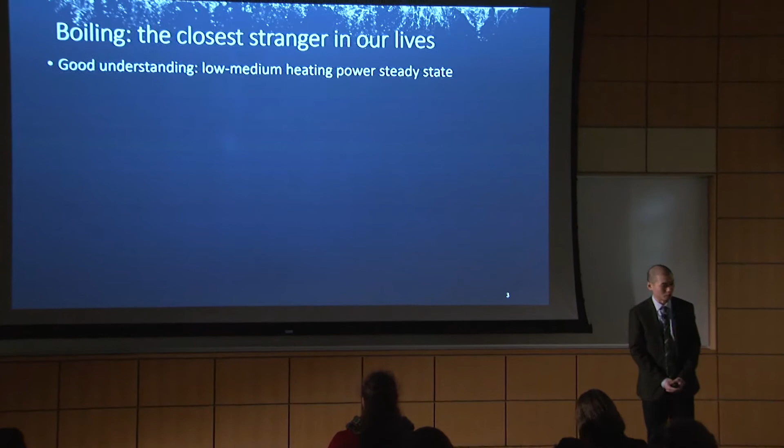Well, that's because boiling has so many different phases. It has our familiar phase. It also has other phases that make us think, wow, this is not the usual boiling we have known for a long time. So this is the reason why I call boiling the closest stranger in my life. So what we have known so far about boiling is pretty much at steady state, low heating power conditions, such as when we are cooking pasta. We can predict everything about that.

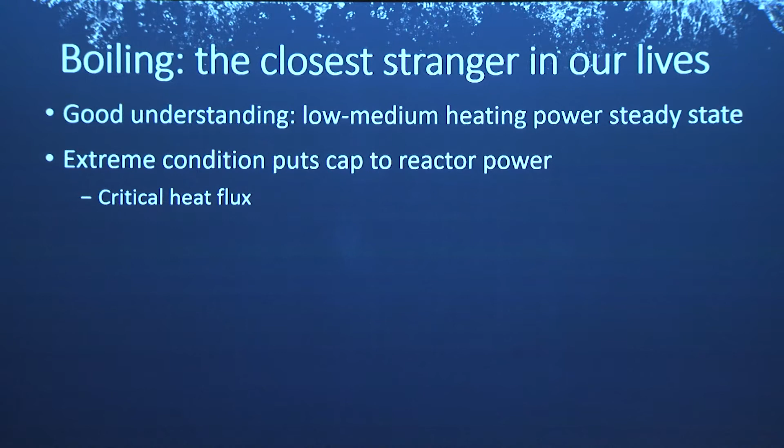But when it comes to extreme conditions, all these traditional theories fail in predicting the heat transfer process. The prediction comes with large uncertainty. Unfortunately, these extreme conditions put the limits to our reactor power. So one of the examples is the critical heat flux. That is the highest heat flux we could achieve with nucleate boiling. So it happens when these nice individual bubbles merge into a complete vapor blanket, which deteriorates the local heat transfer, so the heating wall temperature shoots up.

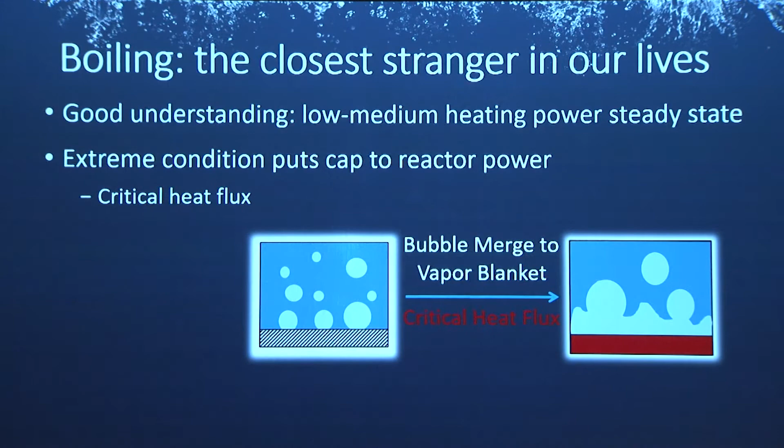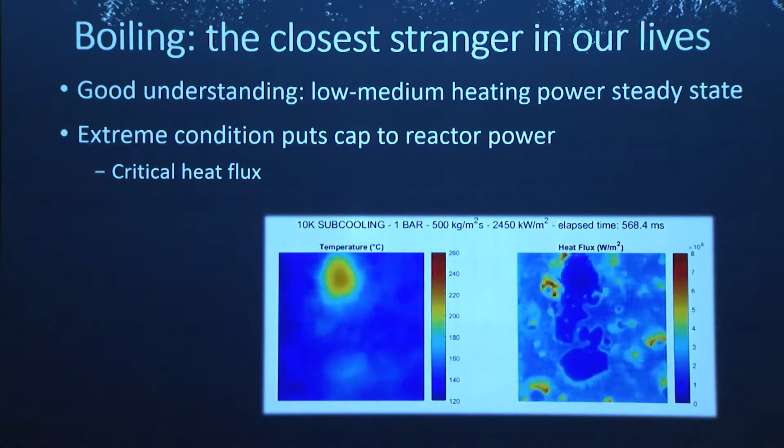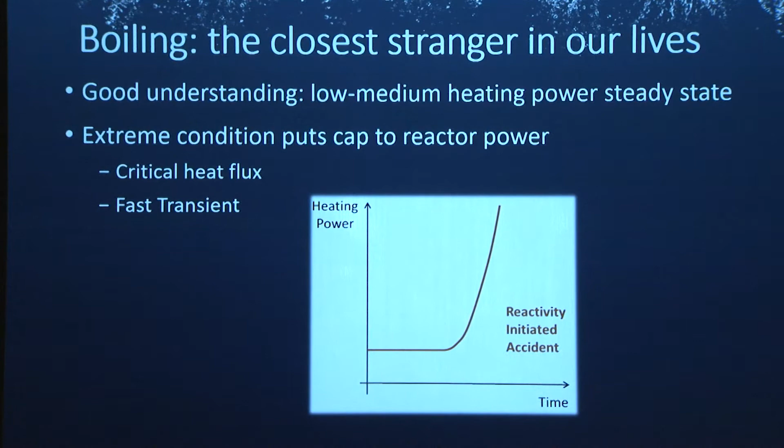This is a nice video of critical heat flux recorded by my colleagues Andrew and Artyom. We can see the heating wall temperature shoots up very quickly around these red spots. So the other example is boiling under extremely fast power input. So just imagine, what if our reactor power shoots up like this in a postulated reactivity initiated accident? What would happen to boiling? So this is what I investigated during my master's.

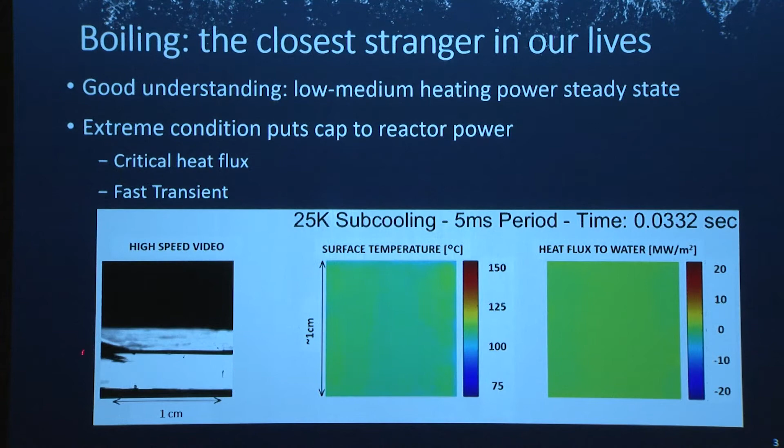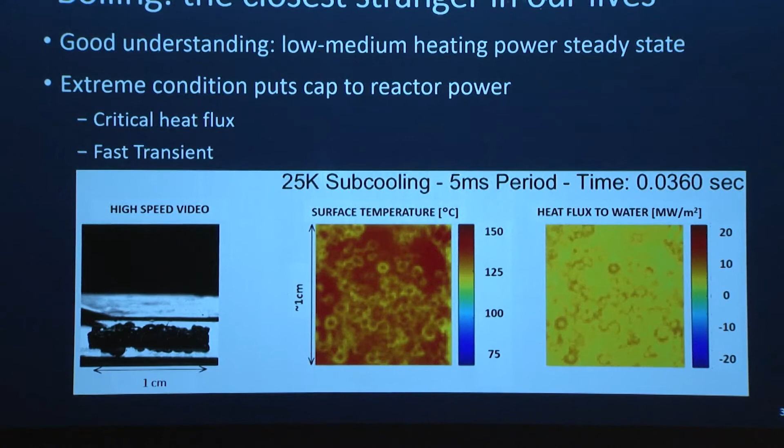So let's focus on the heating surface recorded from a high-speed video here. Instead of seeing several bubbles, we will see hundreds of bubbles popping out at the same time in a very small surface area of only 1 centimeter by 1 centimeter. So this is transient boiling. In this presentation, I would like to focus on the third extreme condition, that's under confined environment, for example, this liquid film in annular flow, which happens close to the exit of the reactor core in a boiling water reactor.

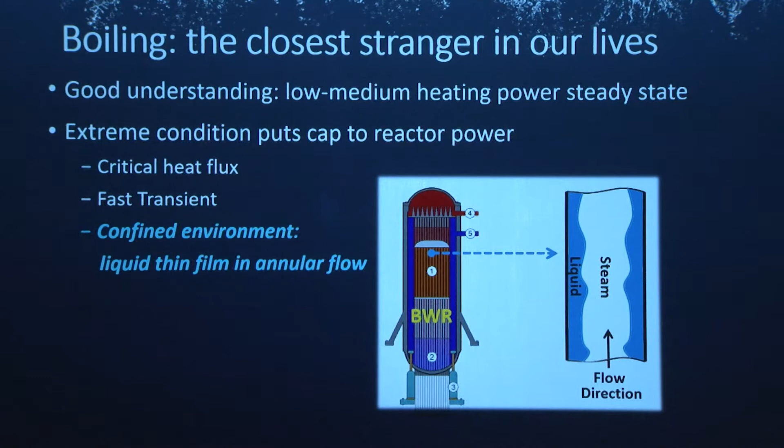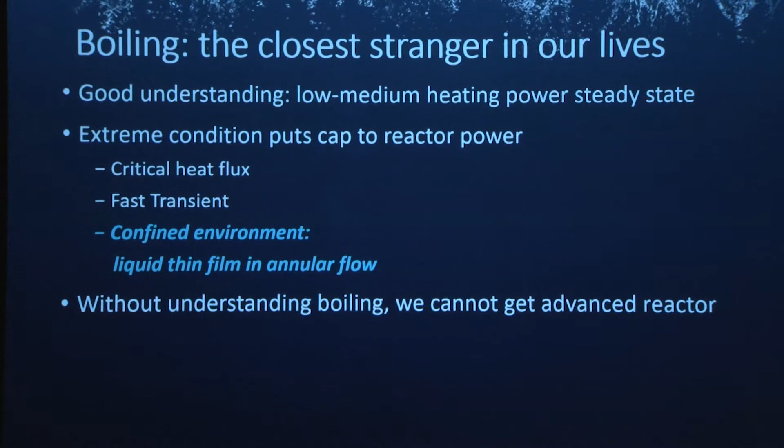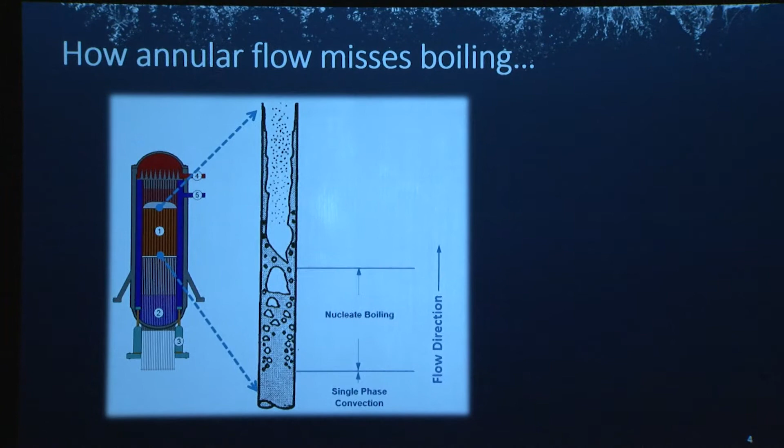So as I mentioned above, without thorough understanding of boiling under these extreme conditions, we cannot get advanced reactors in the future. So now let's gradually move toward my research. So what I'm showing here is a typical boiling channel in a boiling water reactor. So liquid water enters the channel at the bottom. There's a lot of liquid. As it flows upwards, it gradually boils. It is heated up by the fuel rod, and eventually, when there is a lot of steam generated, it merges into a vapor core, and it will eventually reach annular flow at the top of the channel.

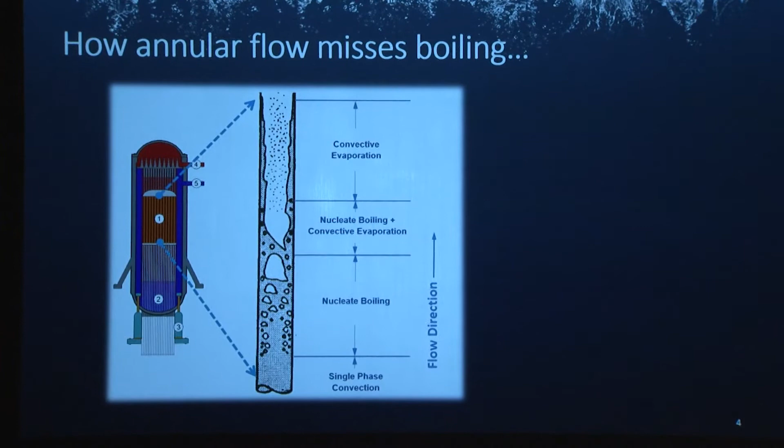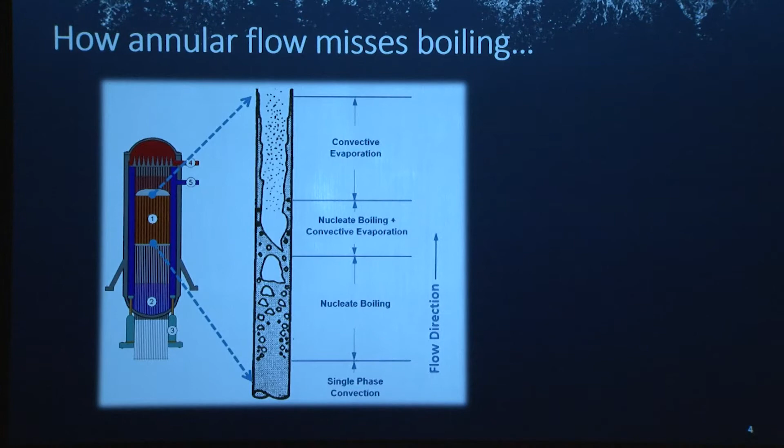So in annular flow, the convective evaporation dominates the heat transfer, which effectively cools down the temperature of the film, so that the nucleate boiling criterion is no longer satisfied. We will not see boiling anymore in the annular flow, unfortunately. Well, this transition from nucleate boiling to convective evaporation is called suppression of nucleate boiling. So my PhD research aims at finding out under exactly what circumstances suppression of nucleate boiling happens.

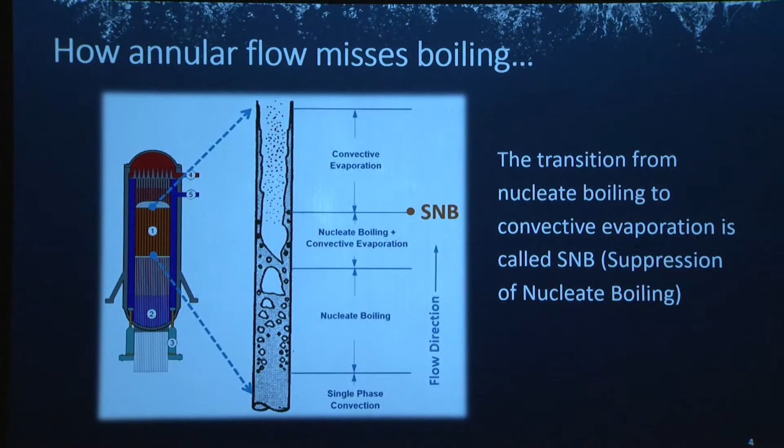In order to do that, I have to measure two important parameters. One of them is the thickness of the liquid film, which is measured by the liquid film sensor we developed in collaboration with ETH Zurich. So this is the working principle. Basically, each liquid film sensor consists of 2 electrodes. So by measuring the current circulating from the transmitting electrode through water to the receiving electrode, we can infer the thickness of the film.

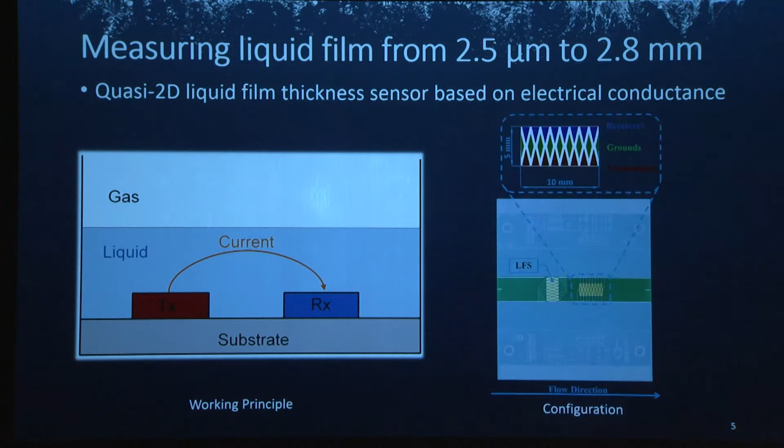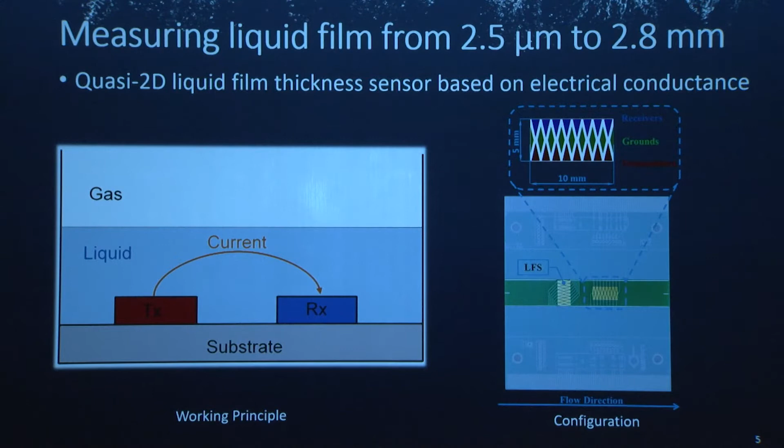And this is what the film sensor looks like. So this film sensor gives us the measurement of the liquid film thickness in 2 directions, the longitudinal direction and the transversal direction. This is a quasi-2D measurement. The other important technique I'm using is infrared thermography. So this infrared thermography gives us another important parameter, that is the heating wall temperature.

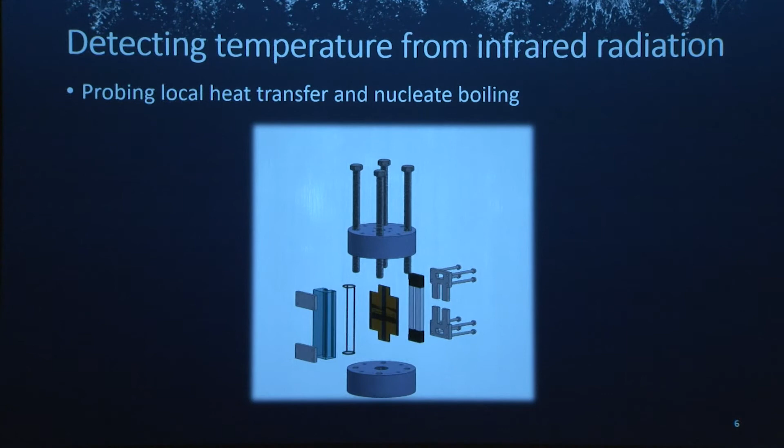This video shows the test section for the infrared thermography. So it consists of a flow channel sandwiched in between two flanges. And there are two major pieces. One is this blue piece, that is a U-shaped channel groove with a square cross-section. And the opening side is closed by our specially designed infrared heater.

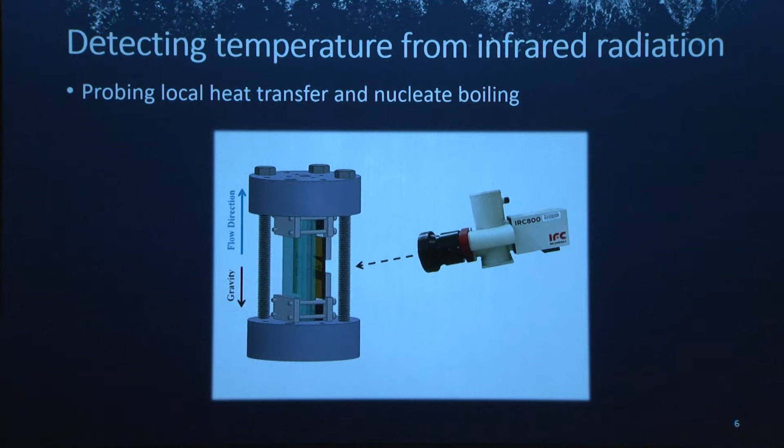So by recording this infrared emission from our specially designed heater through an IR camera, we can infer the heating wall temperature. So now let's have a look at some amazing results. So this is the measurement along the transversal unit of my liquid film thickness sensor. So what we are seeing here is from one side of the channel to the other side of the channel, and this is the film thickness direction, and this is time.

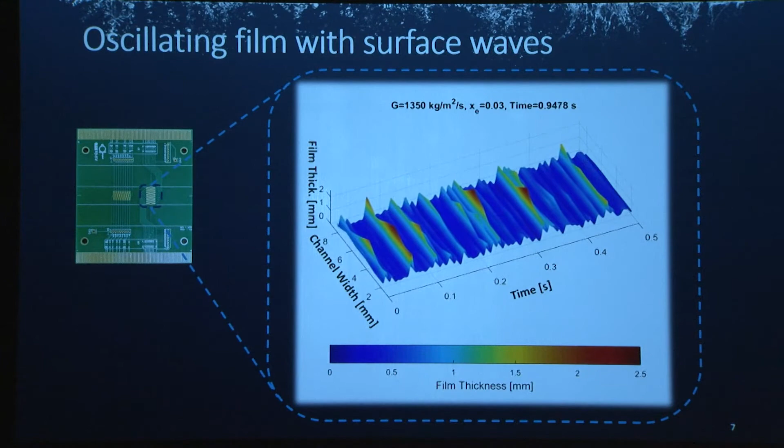So instead of expecting those smooth, nice liquid films, what we are seeing here is a highly disturbed liquid film. We see this large spike of water showing up periodically. This large spike of water is called a disturbance wave. And this disturbance wave is the signature of thin film in annular flow. And this disturbance wave does not only impact the local flow dynamics of the liquid film, it also impacts the local heat transfer, which is reflected by our heating wall temperature.

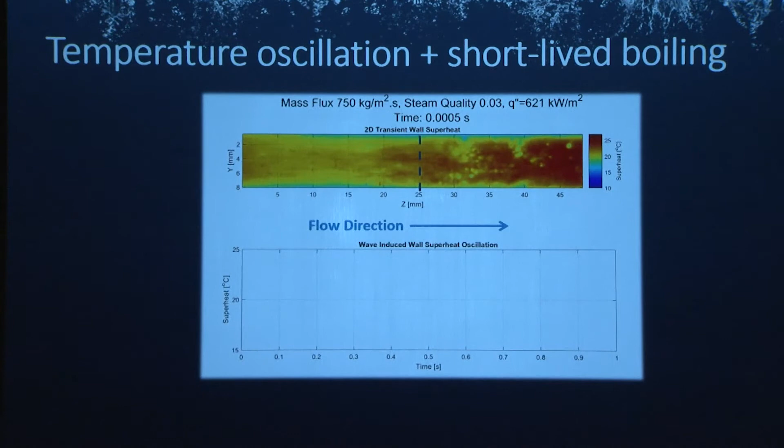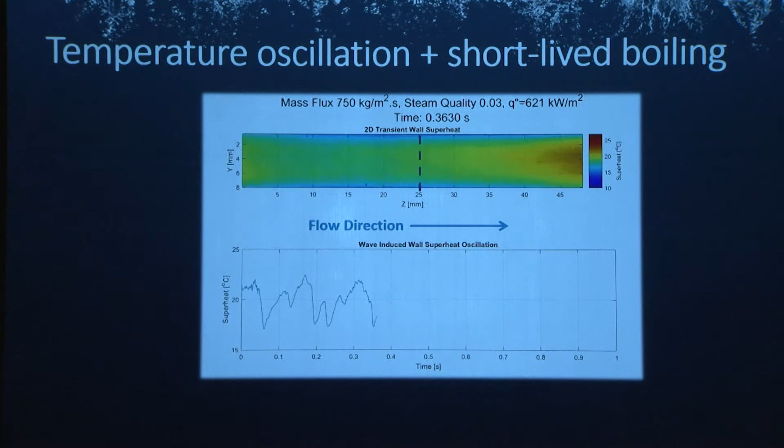So this is a 2D heating wall temperature measured by the infrared thermography. And at the bottom, we'll also see a dynamic plot of the average temperature along this curve. So at this condition, I'm imposing a constant heat flux. But instead of seeing a constant wall temperature, we're seeing this periodic rise and drop of heating wall temperature on top, which is faithfully recorded at the bottom. Well, the takeaway message is that these disturbance waves induce the wall temperature oscillation even at constant heat flux.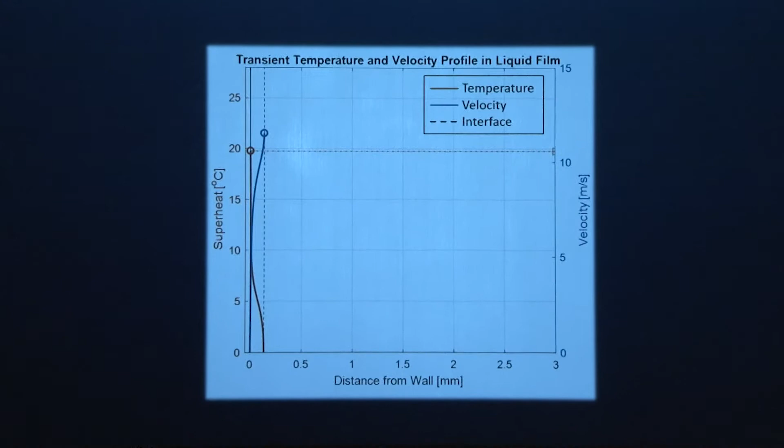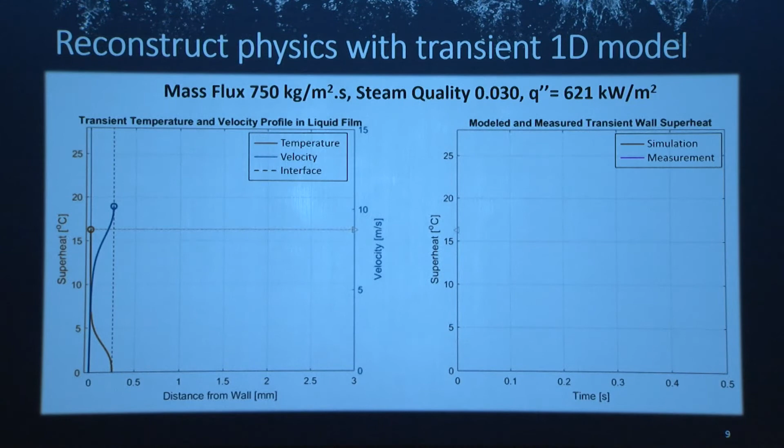When film thickness is relatively thick, we see this velocity profile is relatively low, which results in high heating wall temperature. Conversely, when the film thickness becomes very thin, the velocity goes up while the heating wall temperature cools down because of better heat transfer. Now let's look at something that can move. So what I will show here is an instantaneous velocity and temperature profile on the left. On the right-hand side, I'm comparing the instantaneous simulation of the heating wall temperature with the instantaneous measurement of the heating wall temperature. So what we can see here is very good agreement between the simulation and the measurement result.

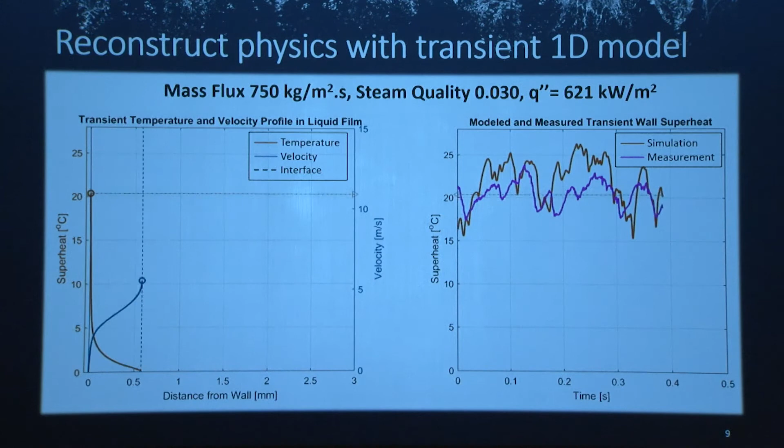And this terrific result really encouraged me to further simplify the model into some semi-empirical correlations so that we can easily apply them in daily calculations or design process, which is shown here. These are the empirical models I developed for predicting onset and suppression of nucleate boiling. So basically what I'm plotting here is the measured result versus the correlation prediction. So whenever these dots line up on this 45-degree line, it means we achieve a good agreement.

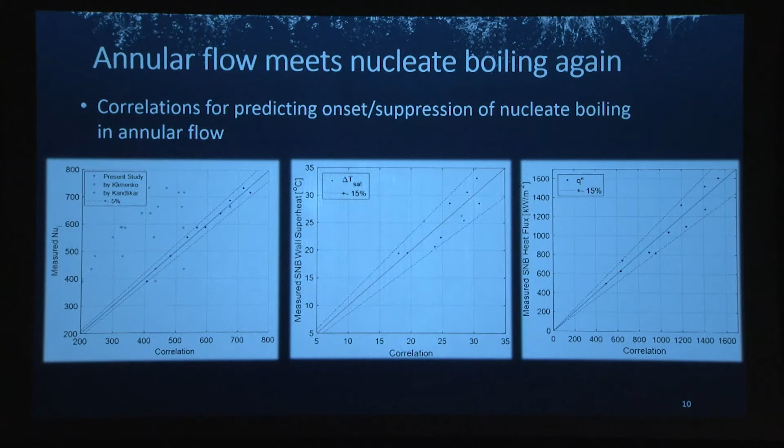So from left to right, we have dimensionless heat transfer coefficient, for which I achieve plus minus 5% accuracy, and then the suppression of nucleate boiling heating wall temperature and suppression of nucleate boiling heat flux, for which I achieve plus minus 15% accuracy. So I'm telling you these are very high accuracy because if I use an old model to predict this, we easily get more than 40% uncertainty when predicting this suppression onset of nucleate boiling.

So eventually, the mysteries of the strangers, which is nucleate boiling in annular flow, are solved. And these novel database and models I developed will lead to a better boiling water reactor design in the future.